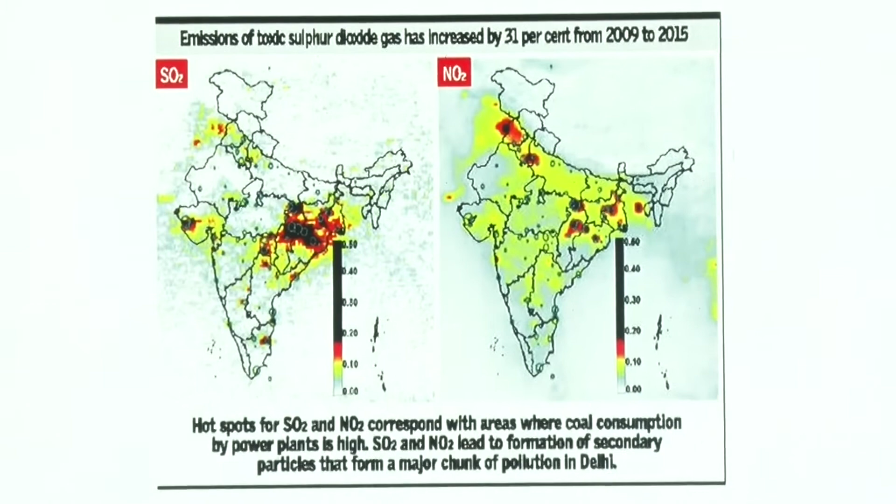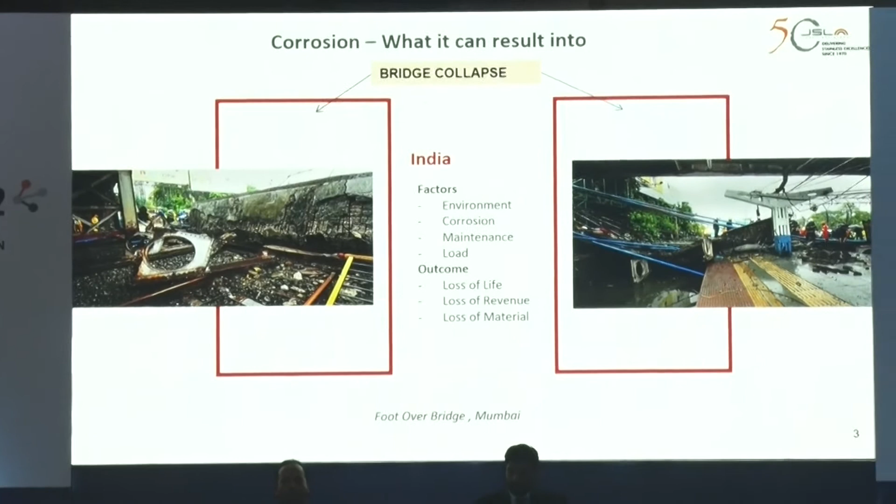According to the World Corrosion Organization, corrosion costs globally around USD 3 trillion. That's a huge figure.

Corrosion is not only limited to the coastal area, as I said, but to other areas also. There has been an incident where a structure failed miserably, resulting in loss of the capital invested and potential loss to life also. And the cost of repairing is definitely much higher, or the exigency cost, than the planning in advance for the higher life of the structures.

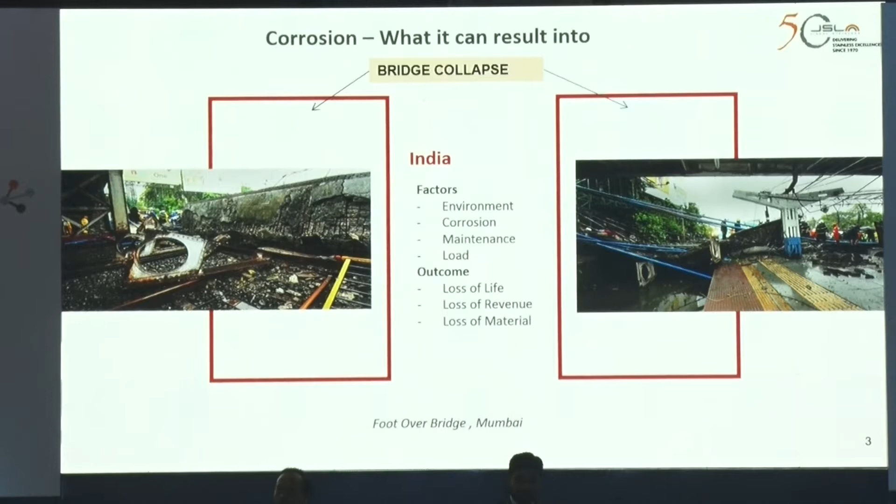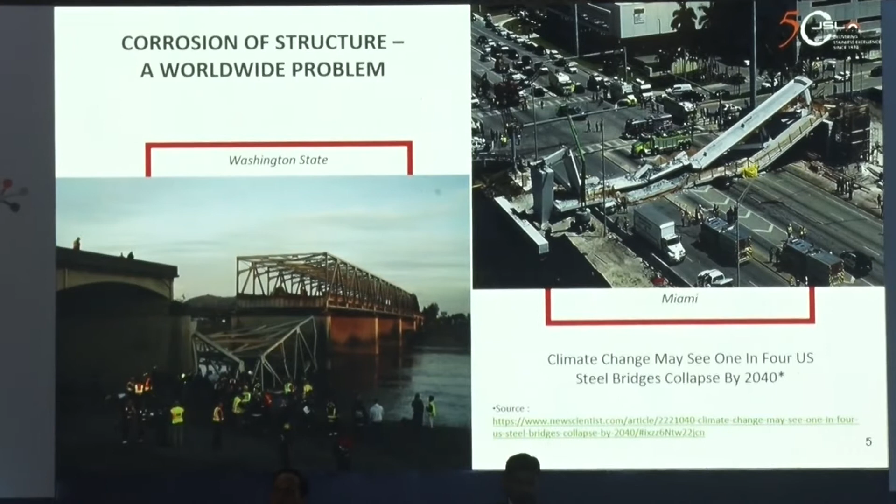These references which I have taken in this presentation are not only limited to India, but we have cases from Taiwan, Washington, and Miami, other areas where these kinds of failures have happened. There are numerous global references for this.

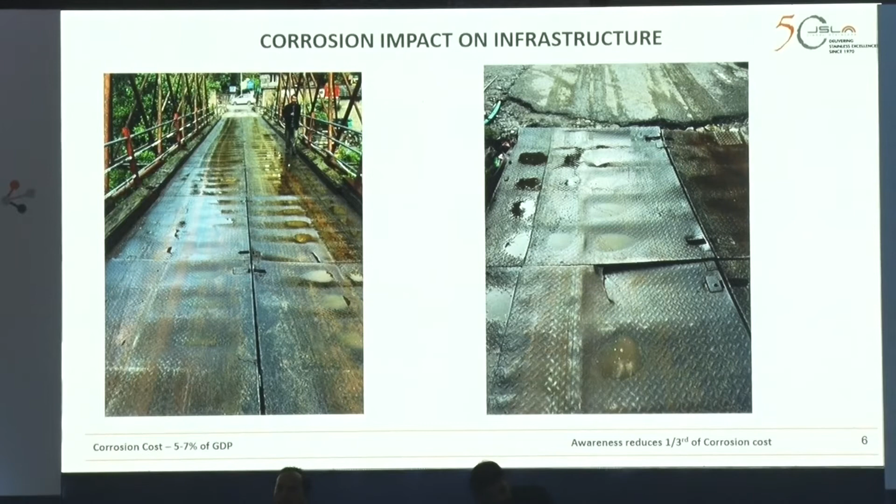You can see the impact of corrosion on some critical areas wherein steel plates are absolutely damaged, unable to bear the load. These are actual site photographs.

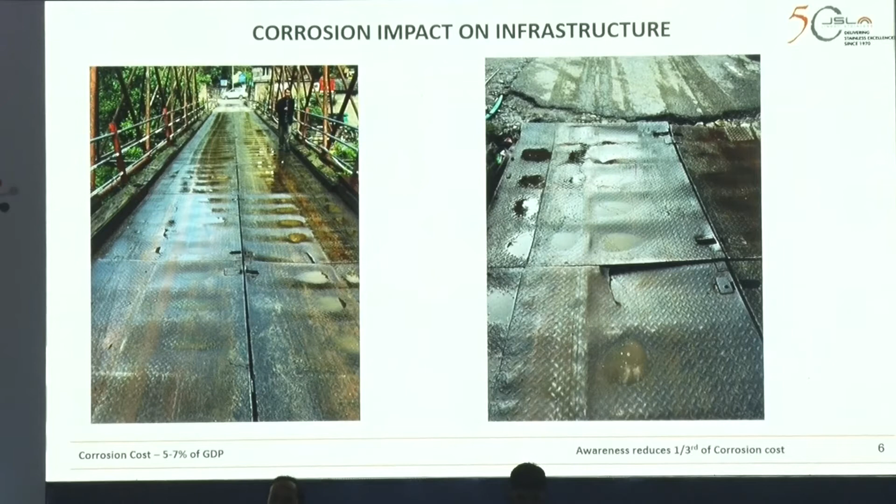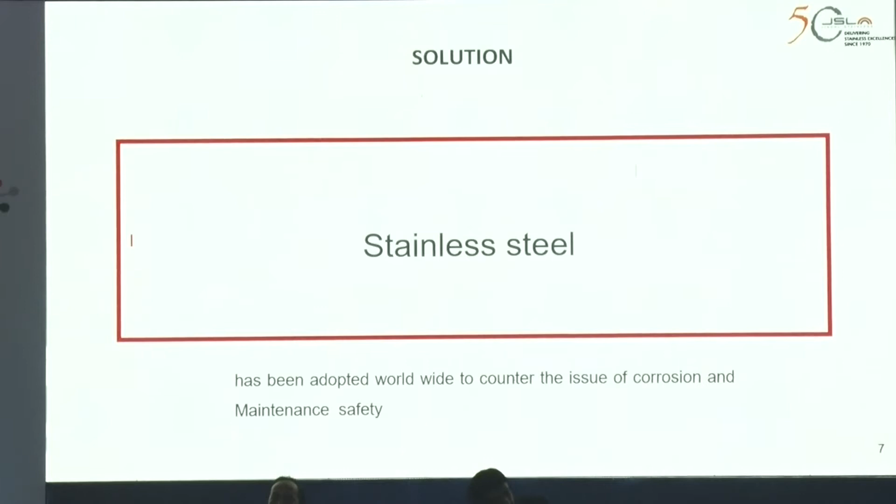Then what is the solution? Adopting the right grade of stainless steel is what I will say. When I say right grade, there is a meaning, because stainless steel is not only one metal, but it's a family where we have more than 300 varieties of grades. I will be elaborating on my offerings.

JSL products - we can supply HRP plates which can be fabricated in the form of girders, and we can also help in supplying fabricated girders as per the client drawings.

Another product we have is checkered plates made out of stainless steel grades, and again a variety of grades we can offer.

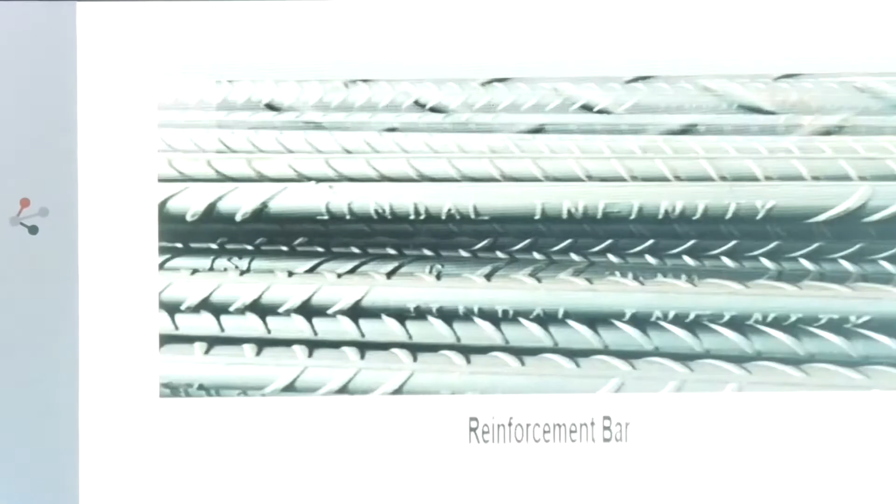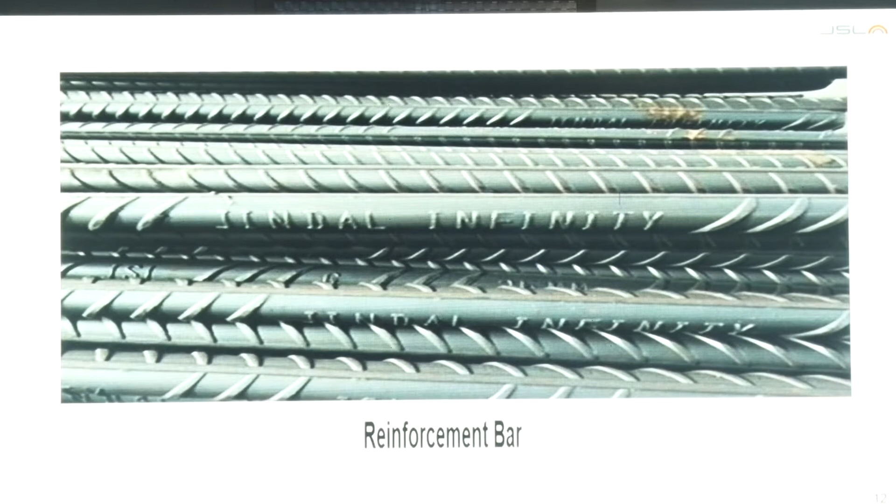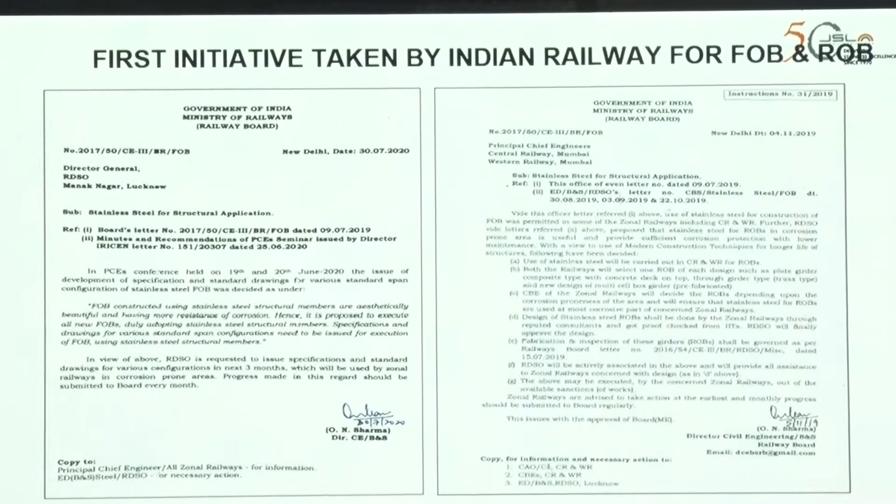Let's talk about the Indian initiative. It started from Indian Railway only, wherein the Ministry of Railway Board guided circular promoted the use of stainless steel, especially for the coastal area initially, and which has been expanded to other areas also.

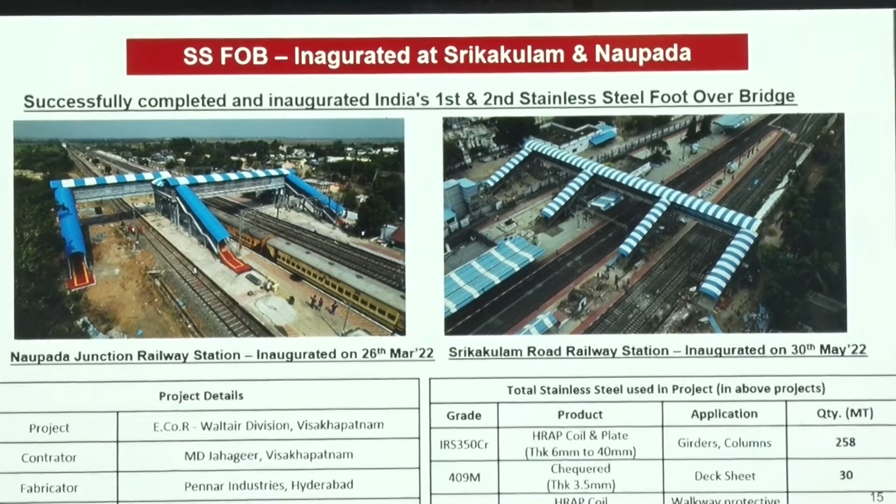To begin with, we have already successfully completed a few projects. These are footover bridges in the Waltair division of Indian Railway, at Srikakulam and Naupada, which were completed in record time. All load-bearing members - columns, girders, bracings, cross girders, whatever is required - are fabricated out of stainless steel grade called IRS 350CR. This is an RDSO approved grade.

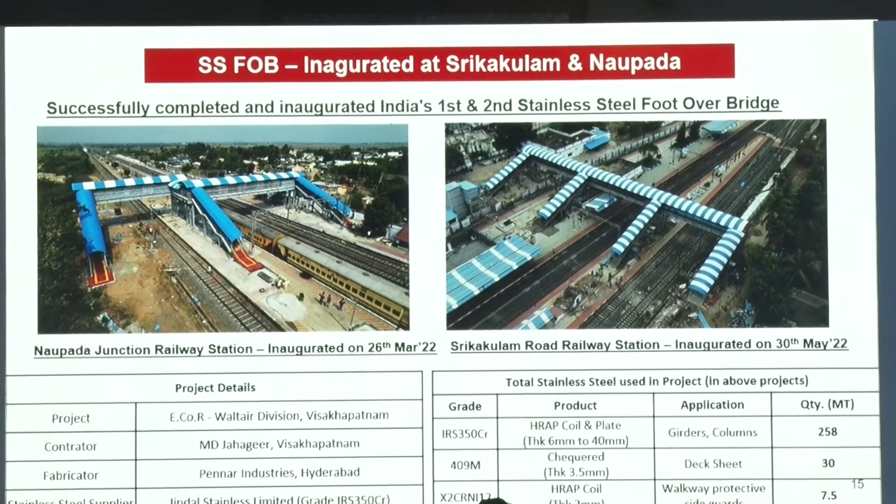These are some glimpses of the opening ceremony, which were held due to their importance. These were inaugurated with a lot of jubilation.

Another footover bridge in Western Railway - the Bhayandar footover bridge. This is also completed and inaugurated, on one of the busiest railway stations in Mumbai.

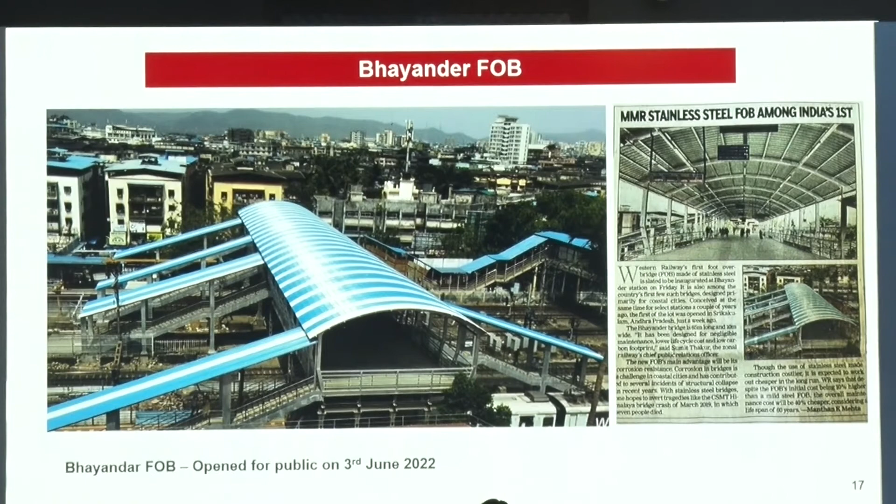Talking about Mumbai, it's not only limited to railway, wherein BMC decided to go a step ahead and used a superior grade, duplex 2205, over the Mrinaltai bridge. All the girders are made out of duplex 2205, and this particular grade was chosen because of very high effluent which was coming, and conventional steel was not able to sustain the kind of severe environment it was facing. This bridge is likely to be completed very soon.

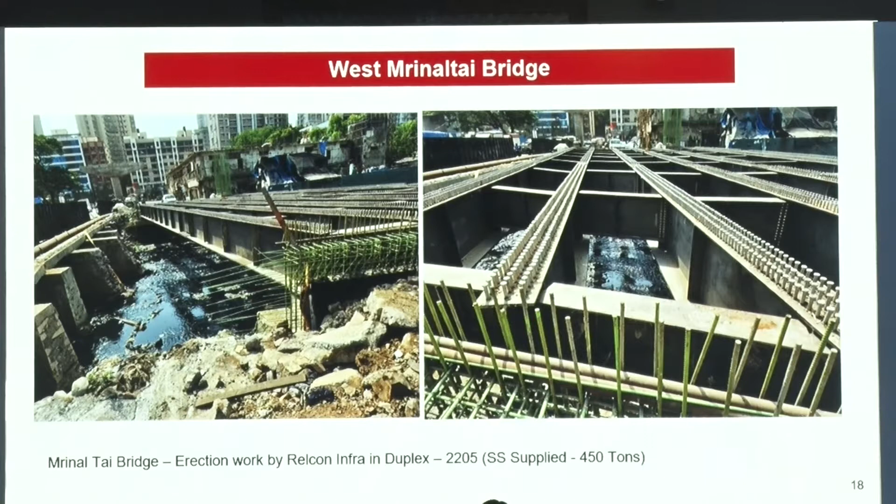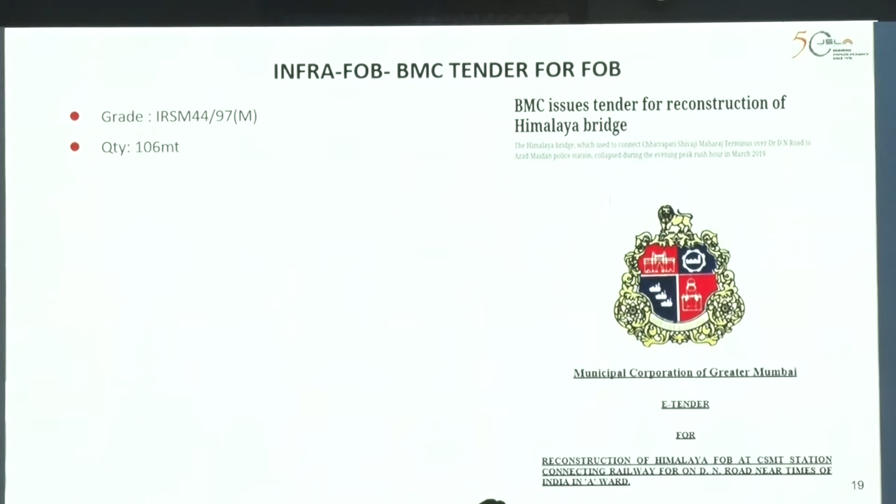Some of the other projects undergoing - BMC has also awarded the prestigious Himalaya bridge and decided to go for stainless steel in this, and the Nehru Science Center in Mumbai.

And from absolutely west to the north also, there have been agencies considering stainless steel for these projects, such as the elevated road project in Hisar.

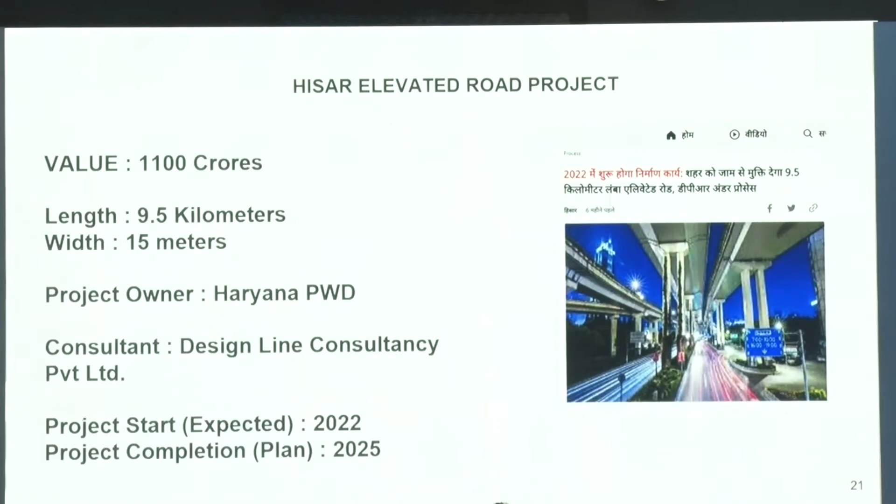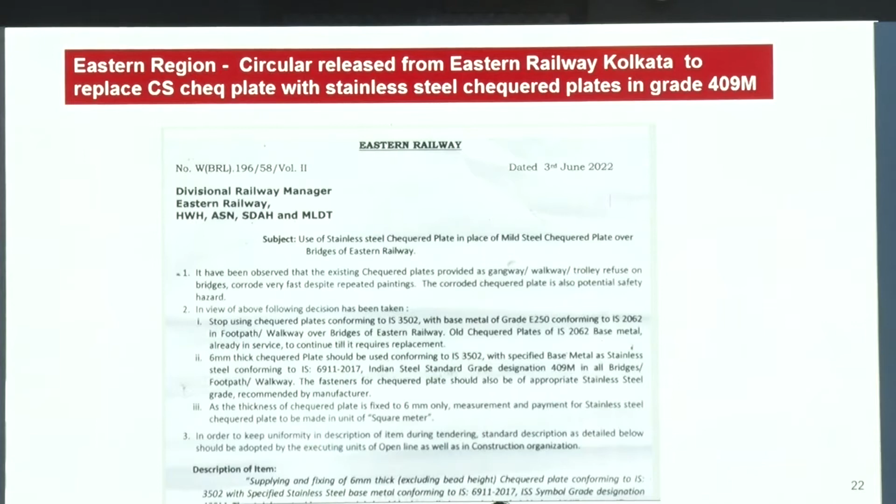In the Eastern region, Eastern Railway has already advised its division to use stainless steel for the pathways, for the sideways, as a stainless steel checkered plate. These are actual pictures of the applications where stainless steel checkered plate has been installed on the bridges.

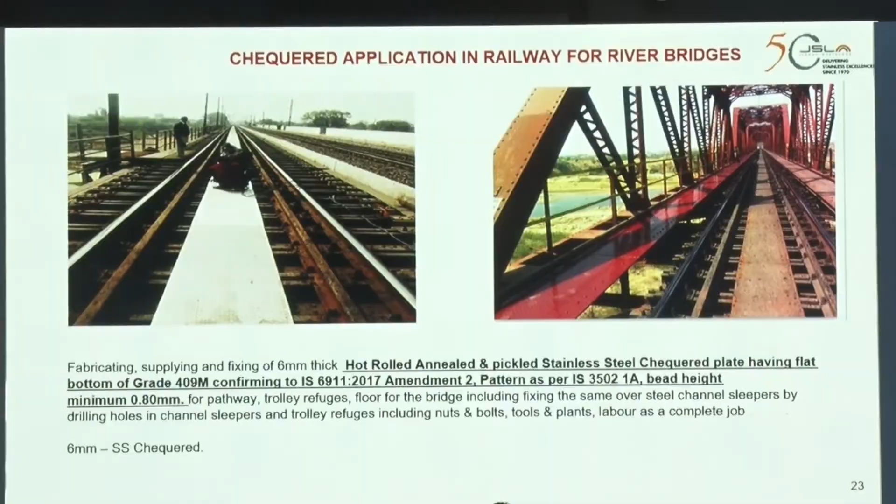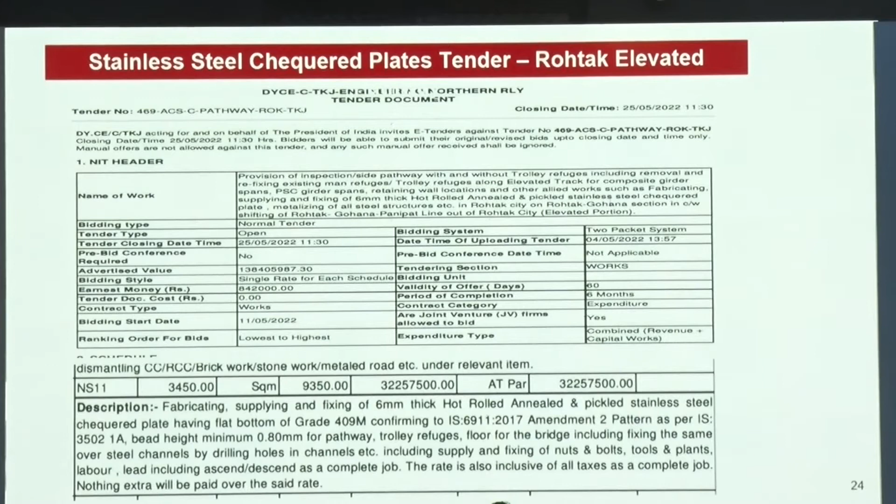Similarly, Northern Railway has also taken the lead from Eastern Railway, and they are also using stainless steel checkered for their elevated project. One of these is coming up in Rohtak.

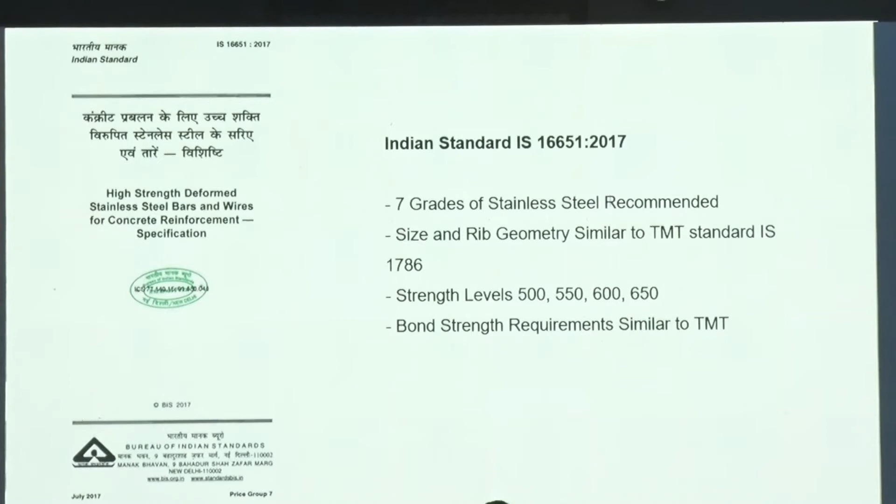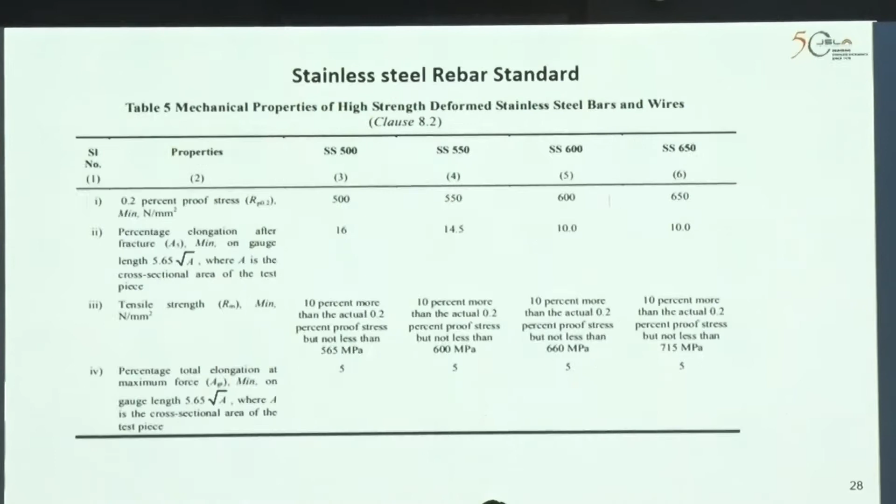As I said, talking about the stainless steel rebar, this is already covered by BIS in IS 16651, wherein 7 grades of stainless steel reinforcement are recommended. These can be made out of that, but at the moment we are promoting IS 410L grade of stainless steel reinforcement bars. As per the standard, we are manufacturing it, and it gives a minimum YS of 500 MPa and onward grades.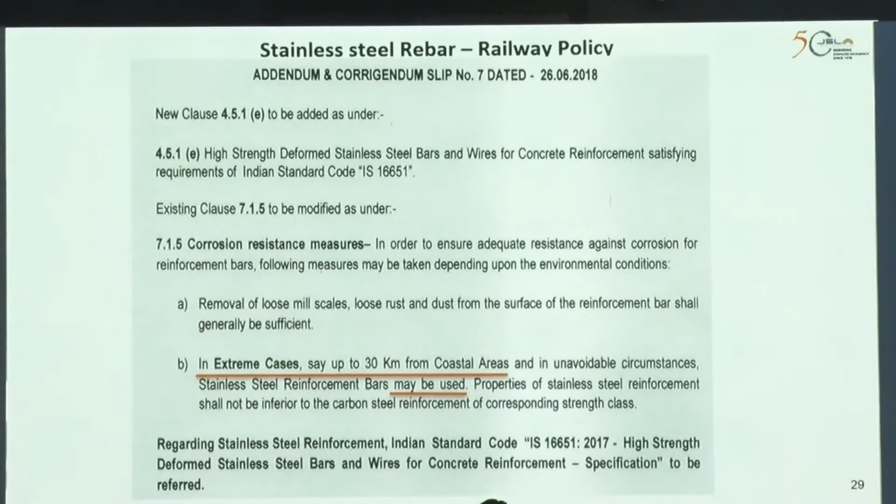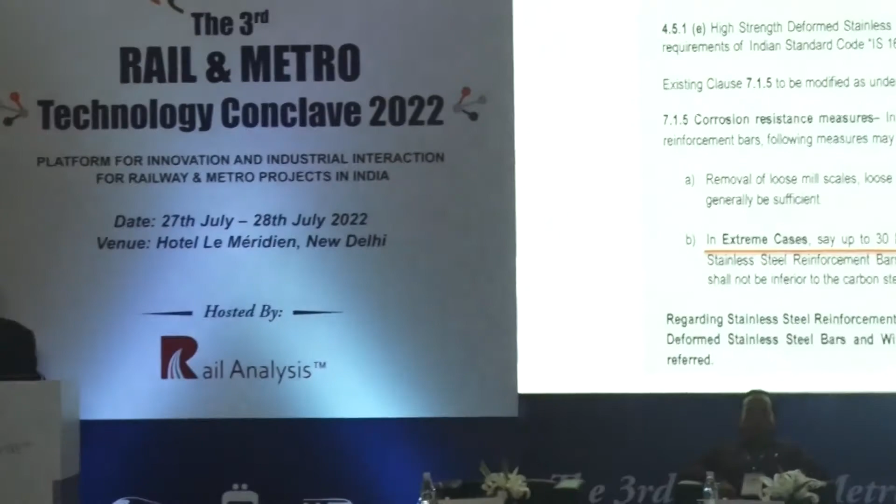Railway-wide, its policy has made mandatory use of stainless steel rebar in many applications in coastal areas, within 30 kilometers from the coastal areas. All the washing lines in Indian Railway are already using stainless steel rebars.

Similarly, NHAI also, via its circular, is promoting stainless steel rebars. And not only the agencies, our Honorable Minister, Mr. Nitin Gadkari, has also advocated the use of stainless steel in coastal areas and all critical areas.

Now, let's come to a little bit about stainless steel. Although this slide might be repeated because yesterday my colleague also showed it. When we talk about stainless steel in simple form, it is nothing but alloying of steel with a minimum 10.5% of chromium. Then it is called stainless steel, and because of this, a passive layer of chromium oxide forms on the surface.

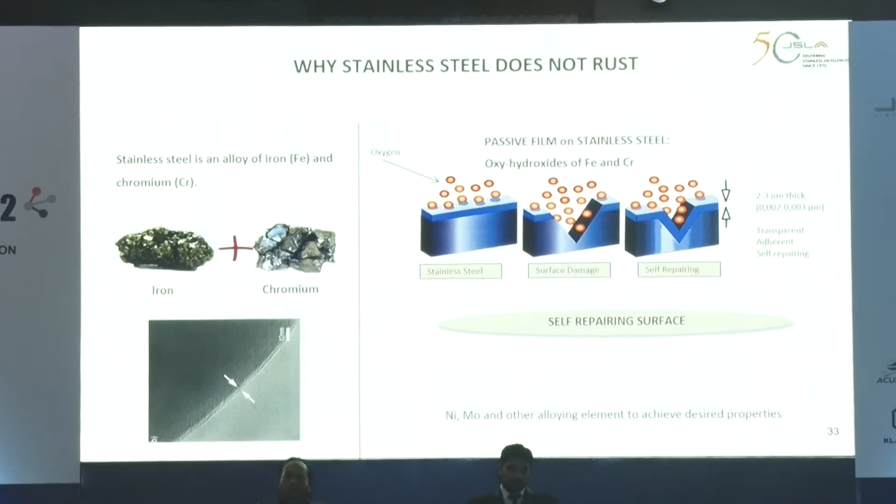This layer is in microns, and it protects stainless steel against any corrosive properties and avoids decay. That is the reason these particular grades of stainless steel live much longer in comparison to conventional steel.

If we talk about low usability, there were a few myths wherein it was considered an expensive material, but if we see the life cycle costing, we may find that on a life cycle cost basis, it may even be a low cost solution.

Earlier there were few grades, and stainless steel typically reminds us of utensils or very aesthetic areas, where structurally there was limited grade, but now there is no limitation. We have enough capacity to produce more grades, develop new alloys, and there are more than 100 grades available across 4 families, and we are continuously developing products for infrastructure.

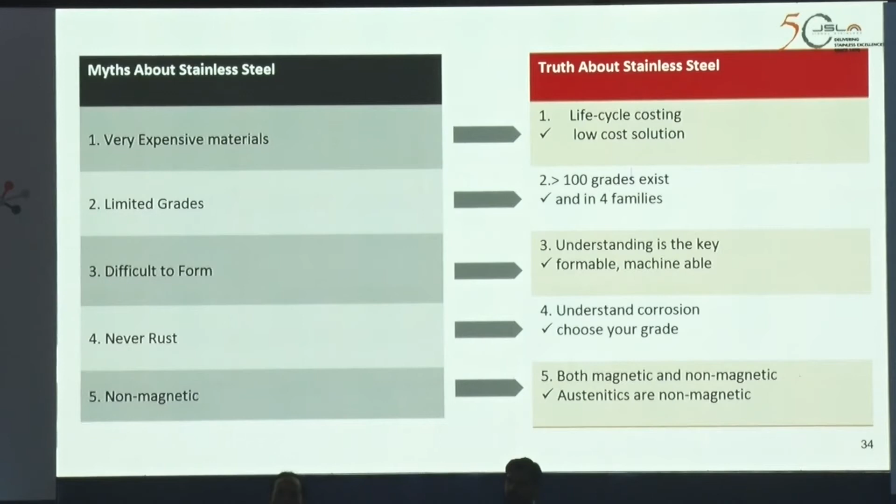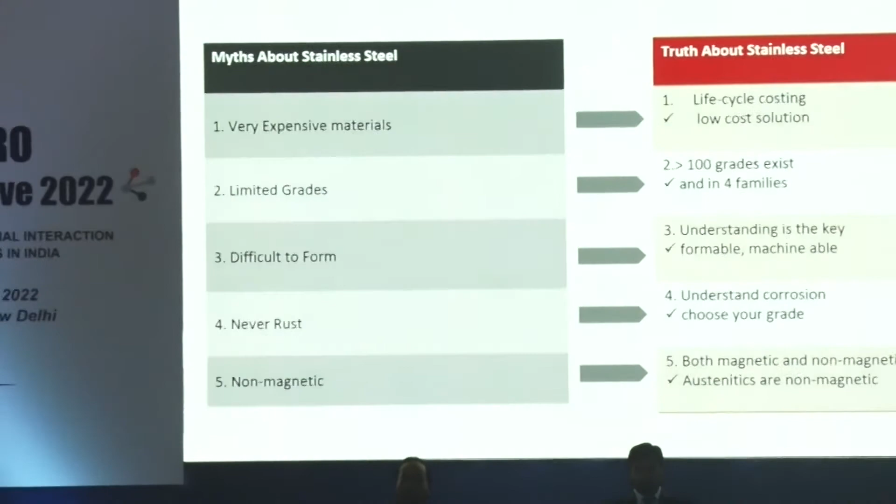There were some myths about formability, weldability, and fabrication, but let me say that most stainless steel grades are easily fabricatable, easily weldable with any electric process, and there is no additional capital required by any industry in terms of welding or formability. It is easy to fabricate.

Both magnetic and non-magnetic grades are available, and there is another thing: sometimes we have a high expectation just because it's stainless. If we choose the right application and use the right grade as per the application, it will certainly give a long life without rusting.

Just to brief, typically we know stainless steel from 3 grades: the 300 series, which is most common, and we all have home utensils made out of this grade. This is called 300 series, 304 or 316, and they have a typical yield strength of 210 megapascal, whereas other grades we offer in infrastructure are mostly in the 400 series grade.

It could be 410L, like I talked about in SS rebars, 409, or others with slightly different metallurgy — it falls in the 400 series. One product, IRS 350CR, which we are promoting for railway bridges, has been standardized by RDSO, and it has a typical strength of 350 megapascal, whereas conventionally we use strength of 250 megapascal. For further superior properties, we have duplex grades existing in the market, which have higher strength and improved properties for specific applications.

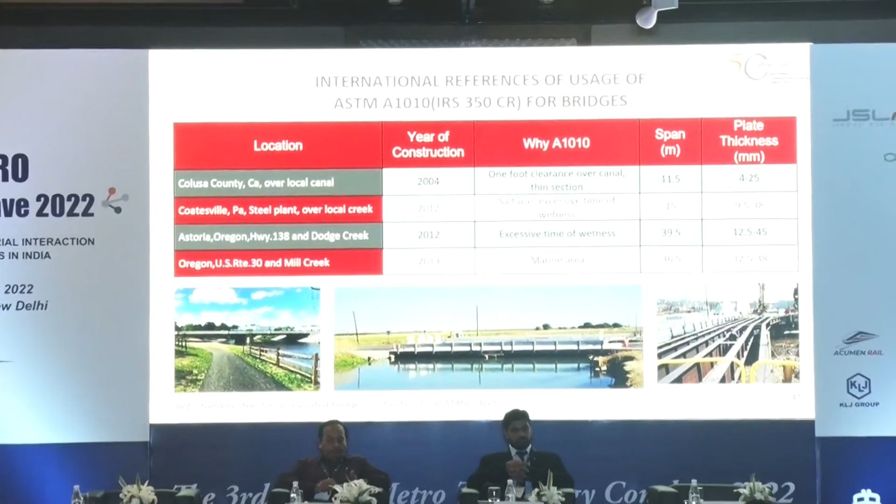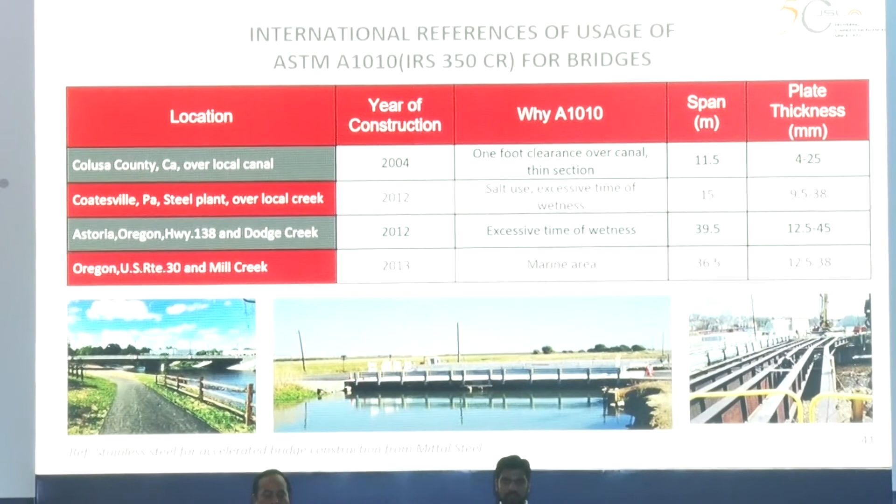If I talk about global references, we currently have only a few in India, but this is not a new material. Under ASTM standard A1010, the similar grade is widely used in developed countries. We have many references across the globe where bridges are fabricated out of similar grades, and they have certainly shown good life.

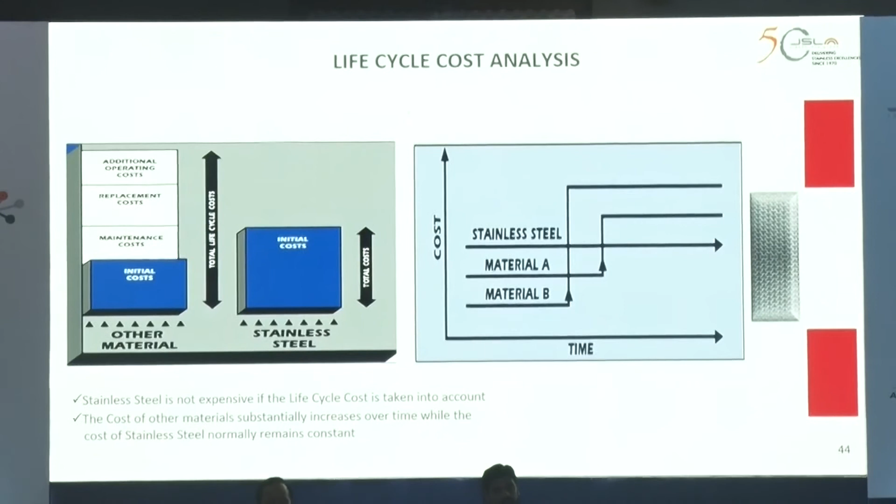In this small graph, I am trying to represent the life cycle cost analysis, where we certainly see a slightly higher capital cost initially, but it reduces the total maintenance cost, repainting cost, replacement, and other expenses incurred on the maintenance of a structure. In the long term, that's why stainless steel at times comes out to be cheaper.

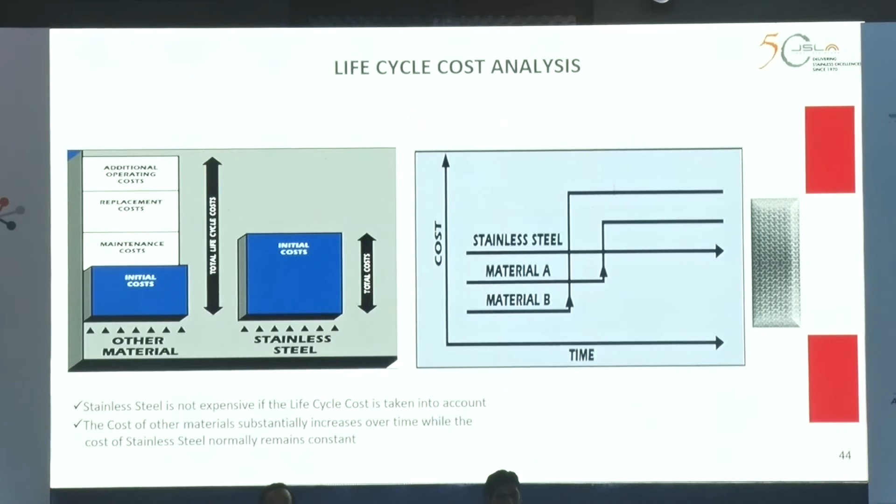We did a study on one of the railway projects with RDSO, and we found that the payback period of the overall project was even less than 20 years in comparison to the increased cost.

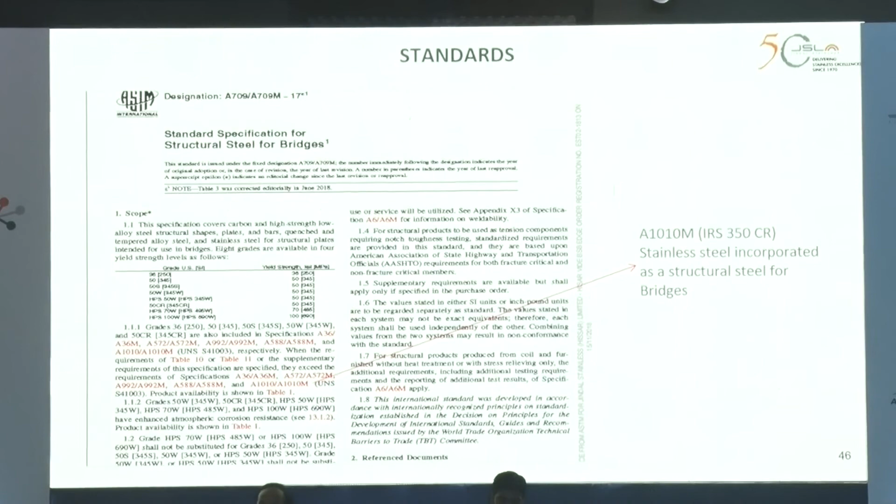There are standards available which have been followed and which refer to this particular grade, modified to give a railway specification. Design manuals are already in place, welding manuals are already in place, and we are there to support.

RDSO has already standardized a few drawings for foot over bridges in the 25 to 30 span and 20 to 25 span ranges. They have also standardized drawings for road over bridges in 2 spans, and these are available on the RDSO website. These are the standards which are available.

The Government of India, Ministry of Finance, has already advised that contracts be finalized on the basis of life cycle cost also. I'm sure if we consider this, stainless steel will come out to be a cheaper alternative to conventional processes.

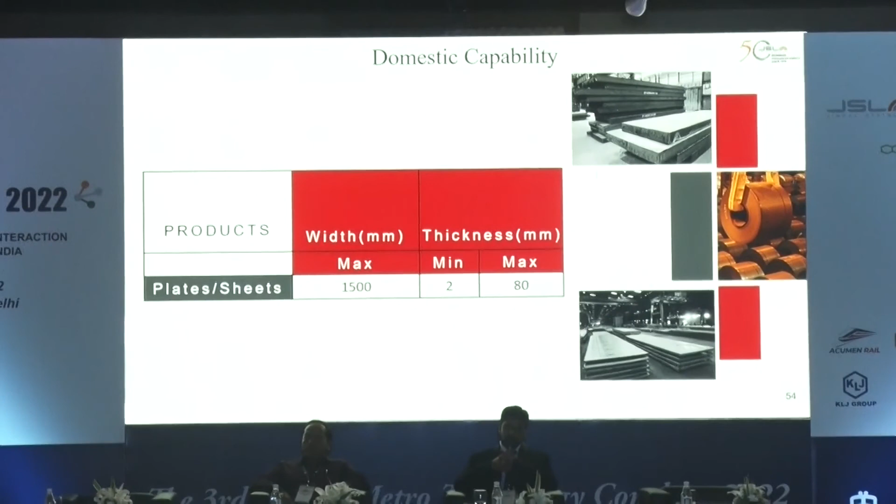Now if I come to domestic capability, we have a huge domestic capability. There will be no limitation as far as supplies are concerned. We have sufficient domestic capabilities, and on the application part we can make stainless steel plates up to 1500 mm width and thickness ranging from 2 mm to 80 mm.

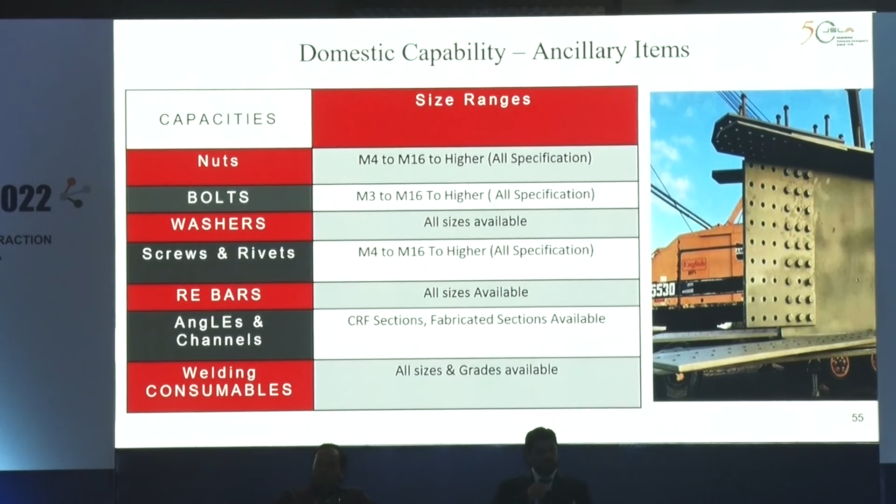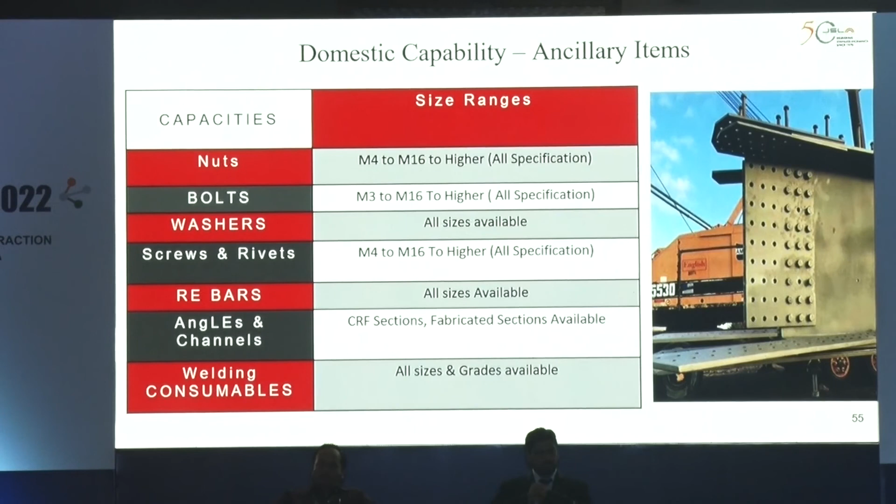Along with stainless steel, other accessories are also required in infrastructure, and this industry is already in place. We can support clients in getting connected with fastener manufacturers, welding product manufacturers, and welding consumables manufacturers. If anybody finds any limitation, they can contact us. This ecosystem is already available for users of stainless steel in the industry.

As I said, at Jindal Stainless we do not just limit ourselves to being a product supplier, but we support our clients in identifying fabricators if they find any difficulty. We are also extending design support, training, and certification to welders and to the industry for completion of this.